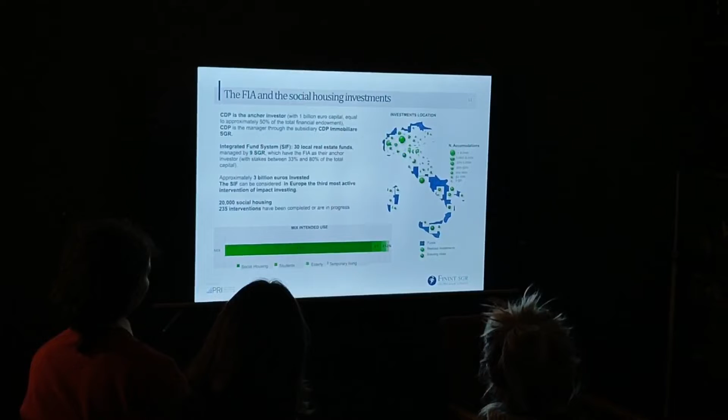So today we have 30 local real estate funds managed by 9 asset manager companies. We invest about 3 billion euros in social housing. For this, the SIF could be considered in Europe the third most active intervention of impact investing.

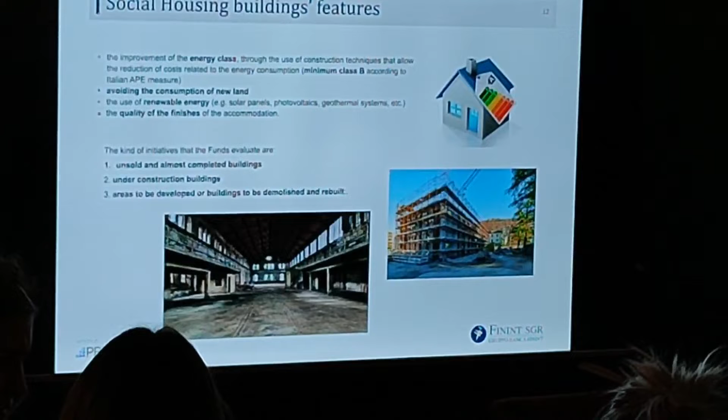We built 235 interventions for a total of 20,000 social housing units. In our social housing building, we pay a lot of attention to energy efficiency in order to reduce the cost of energy consumption, so affordable price and a reduction of energy consumption.

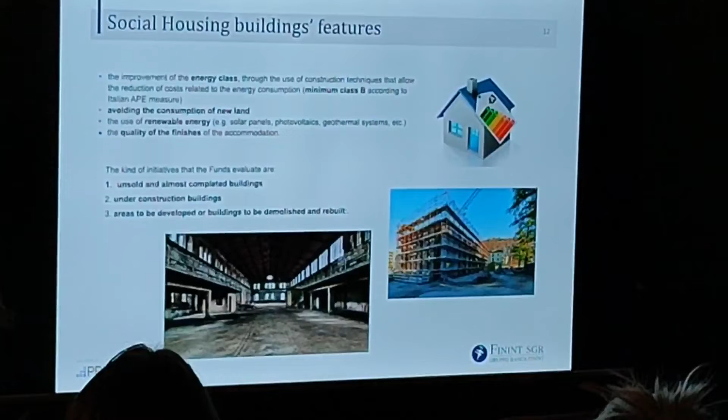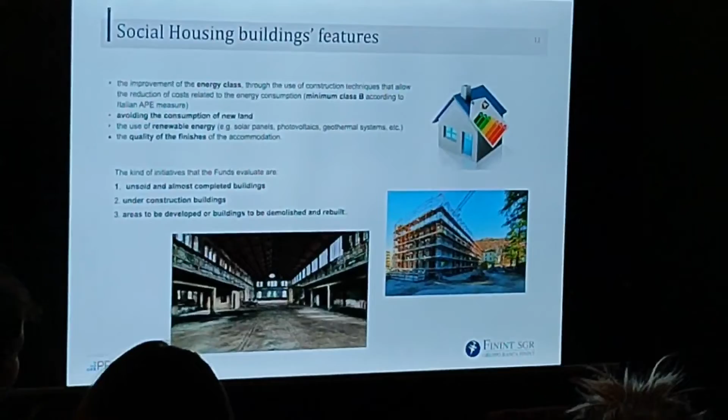We avoid consumption of land, because Italy is an old country, and over the years we have built in almost all the Italian territory. Now our cities are full of disused buildings, so we try to redevelop these buildings, to transform them instead of using new territory.

Then we try to use renewable energy, like solar panels, because in Italy we have an important natural resource, the sun. So we try to use as much as possible solar panels, photovoltaic, geothermal systems, and we pay a lot of attention to the quality of finishes of the accommodation, to give a house of quality to the people.

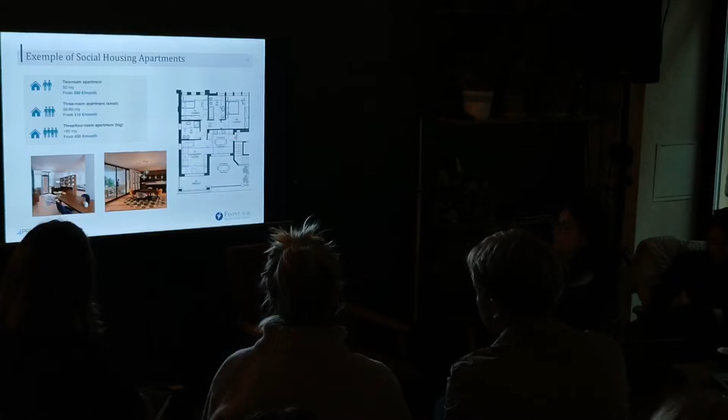In the building, we used to put different types of apartments with different dimensions. We have 2-room apartments that are about 50 square meters, preferred by young people because they are the cheapest, and usually this typology is the most numerous in the building.

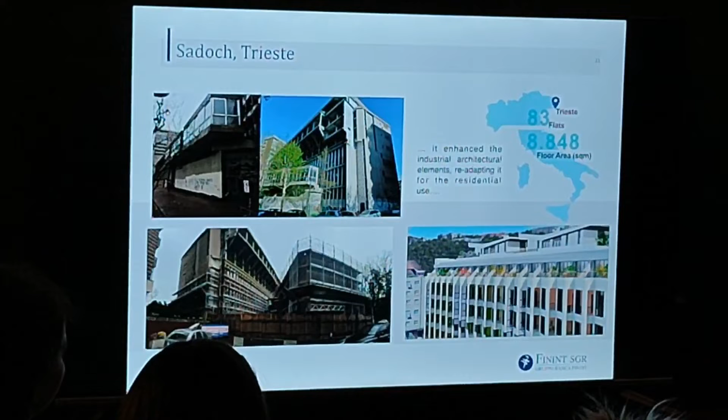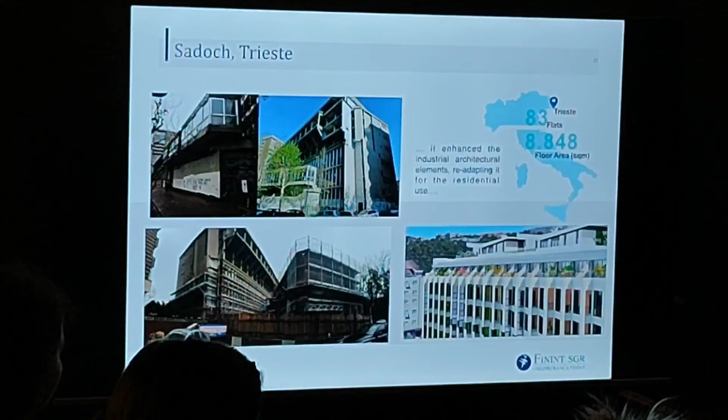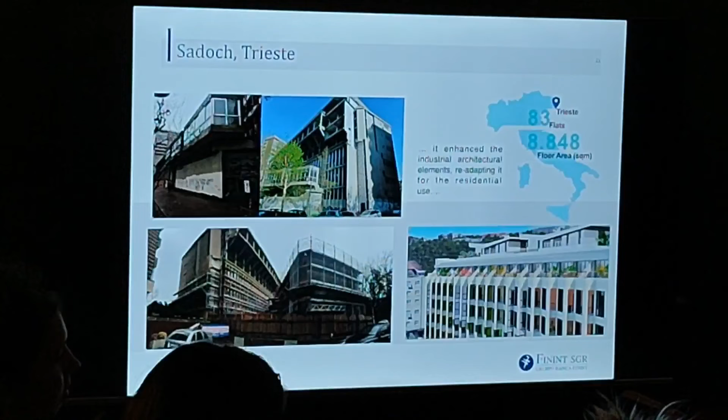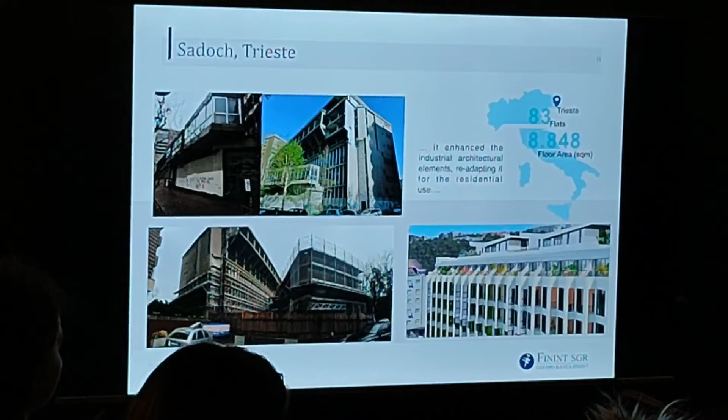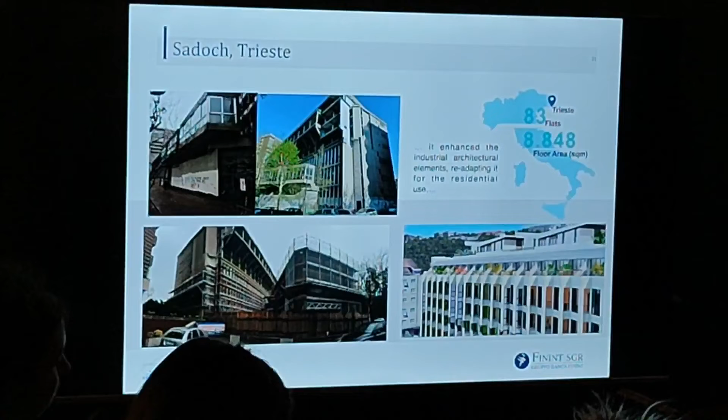In 2016, the fund purchased the building, and after deep remediations, the fund developed 83 flats and 2 big common spaces for sharing activity. The project aimed to respect the history of the building, so we couldn't demolish it, but we had to readapt it for residential use.

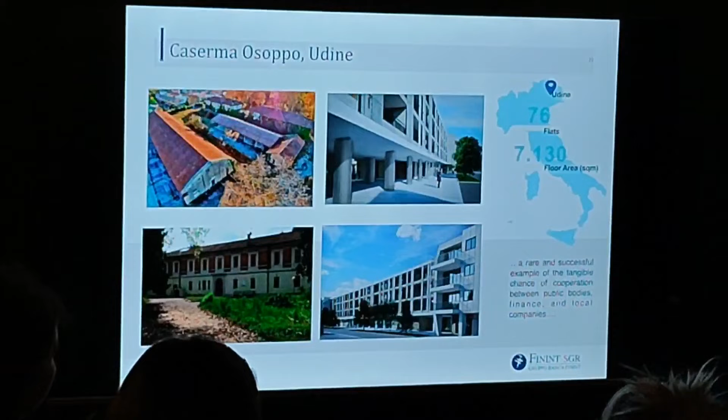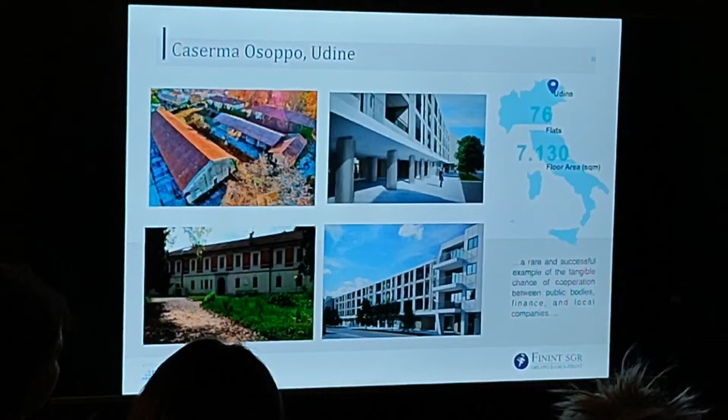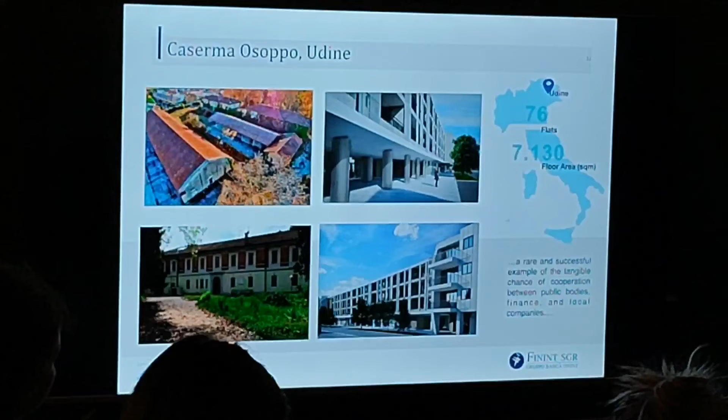Another important project now under construction is the redevelopment of a disused barrack in the center of Udine. The project is called Experimental City and was promoted by the municipality of Udine. The fund will build 76 social houses. This project took part in a call for projects named Bando Periferie, launched by the Italian state, and we achieved public financing.

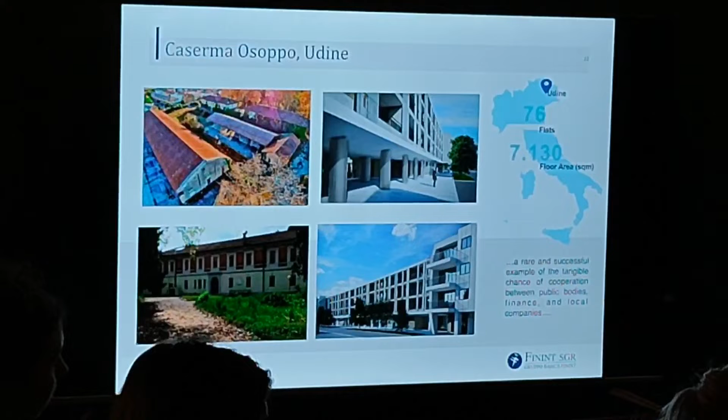It will be a real urban revolution through a deep remediation that will give new life to the district, with new social activities, new residential units, new shops and sport areas.

The other very important fund for us is Fondo Housing Sociale Trentino, which invests always in the north of Italy. We built 500 houses and another 16 are under construction, so we have finished the investment period.

We invested about 113 millions. Here the most important investor is always FIA, with 60% of equity. The second investor is the Provincia Autonoma di Trento, which is also the promoter of the fund, an investor with 20% of the equity, and a contributor with non-repayable grants.

One of the most important projects of this fund is called Ex Marangoni Rovereto, a redevelopment of a disused industrial area in the center of the city. In the area were old buildings belonging to Marangoni Meccanica, an industry that produced machinery for rubber vulcanization. The old building complex was disused in 2007 and the area was abandoned and contaminated.

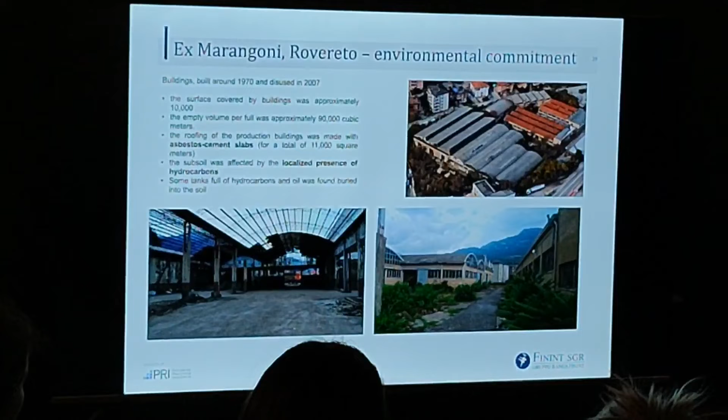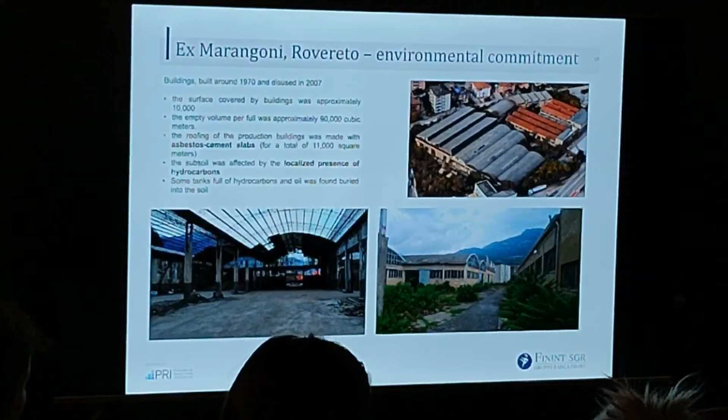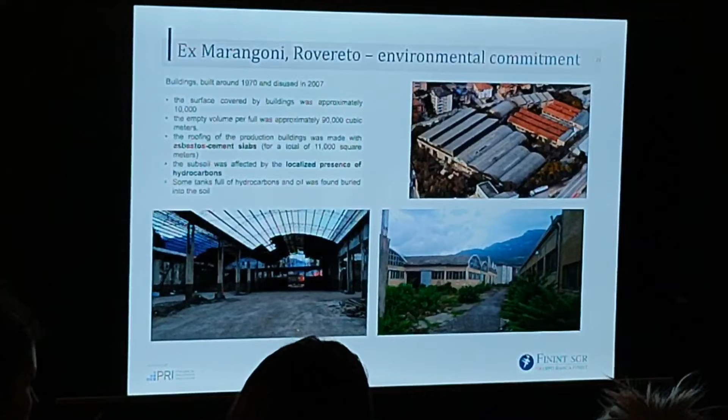The volume of the buildings was approximately 90,000 cubic meters. From an environmental point of view, the roofing of the production buildings was made of asbestos cement slabs, and the subsoil was affected by the presence of hydrocarbons. Furthermore, during the remediation phase, we found buried tanks still full of hydrocarbons and oils, so the remediation phase lasted more than 6 months.

The Ex Marangoni buildings are made of solid X-lam plywood. We started to use wood for construction only in the last few years. Maybe you in Tallinn don't use wood for construction? Okay, I will talk about it.

We started some years ago. This technology involves the complete construction, starting from the ground floor, with the construction on site of the floor.

The advantages of using wood as a construction material are, first of all, the reduction of construction time, since wood is a light material and each element is easily transportable and manageable on site. Wood is renewable and recyclable. It's an excellent thermal insulator and a good acoustic insulator, helping to reduce energy consumption. Wood structures also have excellent resistance to seismic actions.

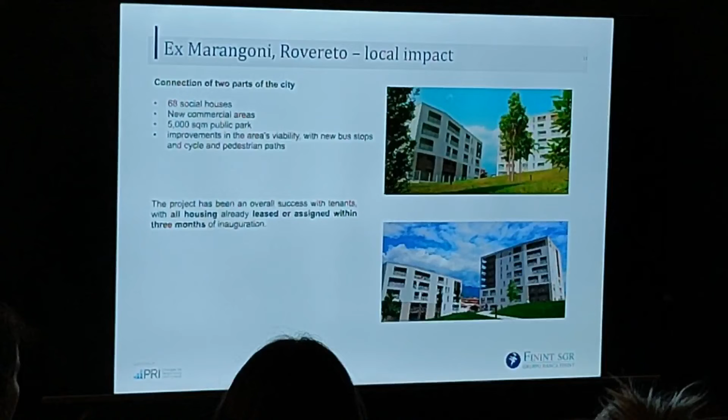So now in this area there are 68 social houses, new commercial areas, and 5,000 square meters of public park. We also improved the area's viability with new bus stops and cycle and walking paths.

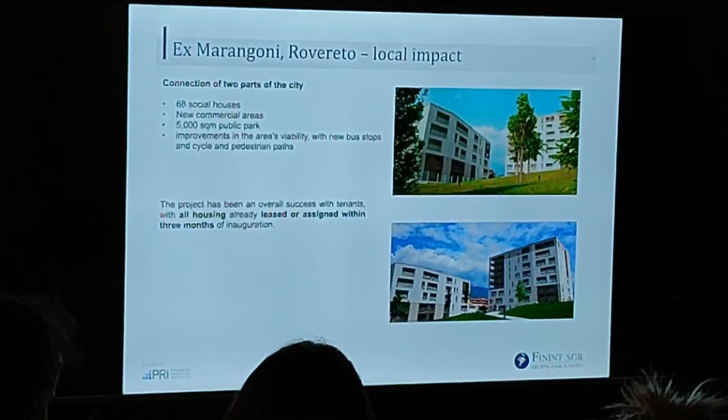In the project there are also some smart solutions. We have environmental smart solutions and social smart solutions. We have a smart irrigation system, urban gardens, bike sharing, and an electric car charging area. We also have social smart solutions such as the book crossing facility and the library of objects, where people can share some objects.

Then we have a smart access system through a digital key managed by a smartphone application that improves the security level of the building, and we have an area dedicated to smart working and free Wi-Fi. There is also a smartphone application to use these smart solutions, and the application also has the task of making communication between tenants easier.

So I don't know if I have more time, or 4 minutes. Okay, very quickly then.

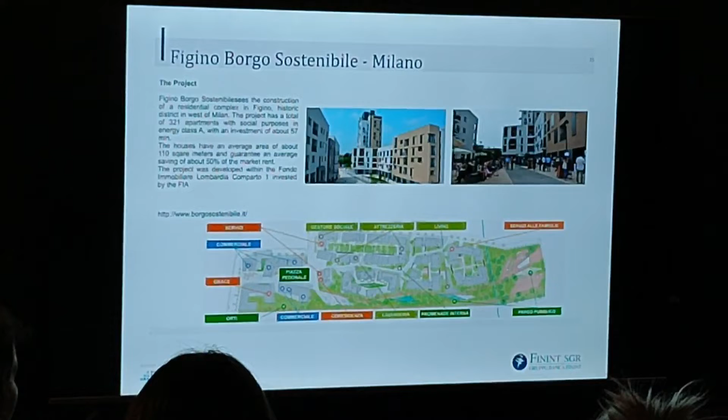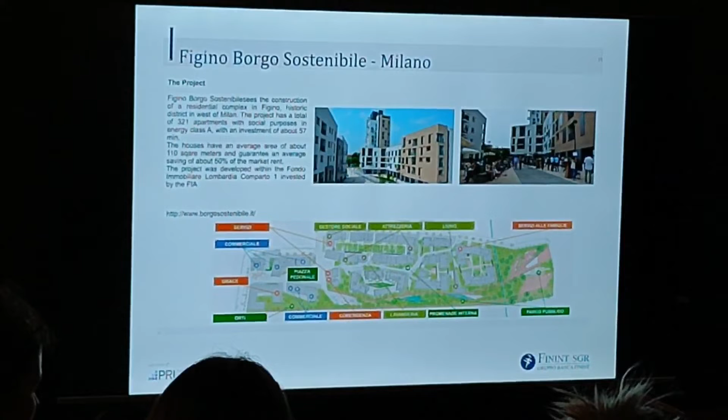Then we have another project, always in Milan. I think this is one of the first projects of social housing in Italy. Borgo Figino is a complex of 321 apartments in energy class A, the highest in Italy, with an investment of about 57 million. The houses have an average area of about 110 square meters. The project was developed with Fondo Immobiliare Lombardia, a fund invested by the FIA, part of the integrated system fund.

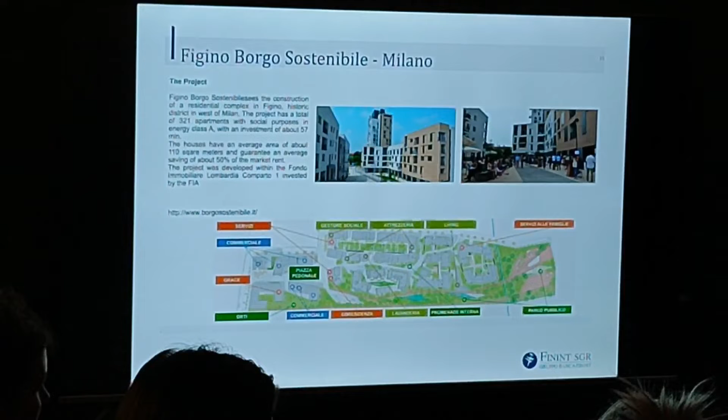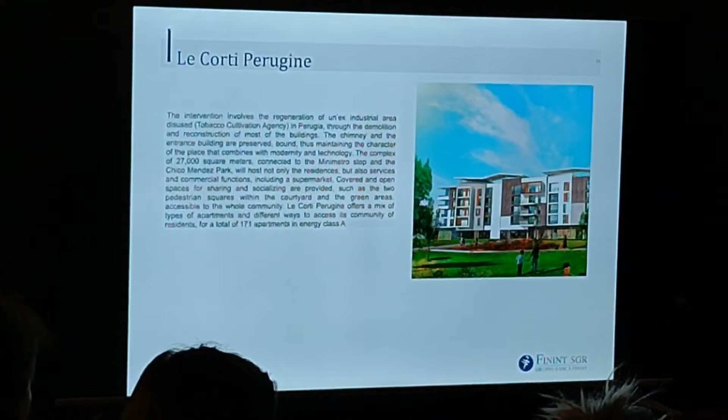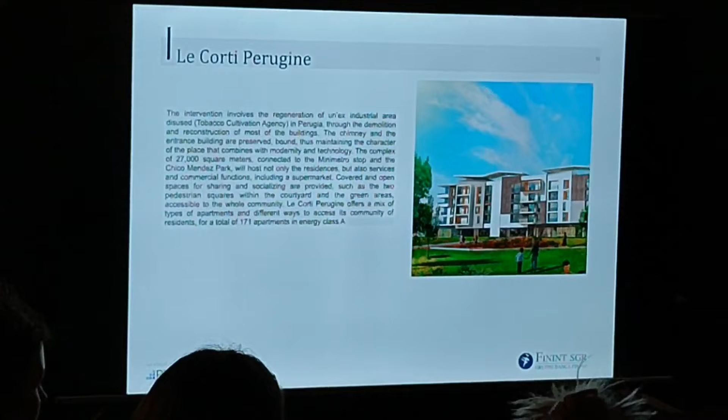The last one is the Corti Perugine. It's a project located in Perugia, in the middle of Italy. It's the regeneration of a disused industrial area, it was a tobacco industry. The complex of 27,000 square meters is located in the center of the city, and now there is a total of 171 flats, always in energy class A.

So now I finish. Thank you. Thank you to you.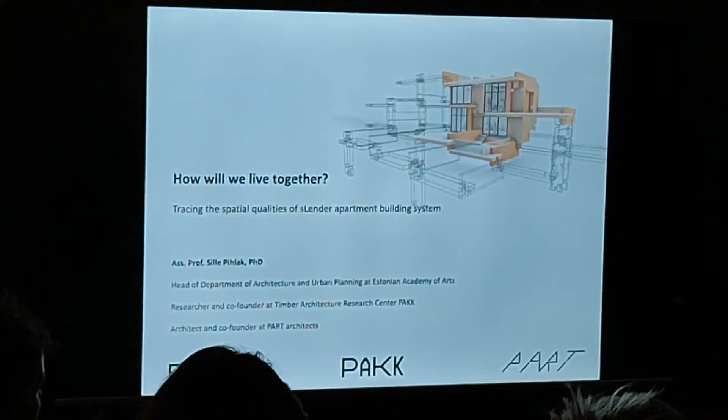Right on time. So... No, this is good. Thank you.

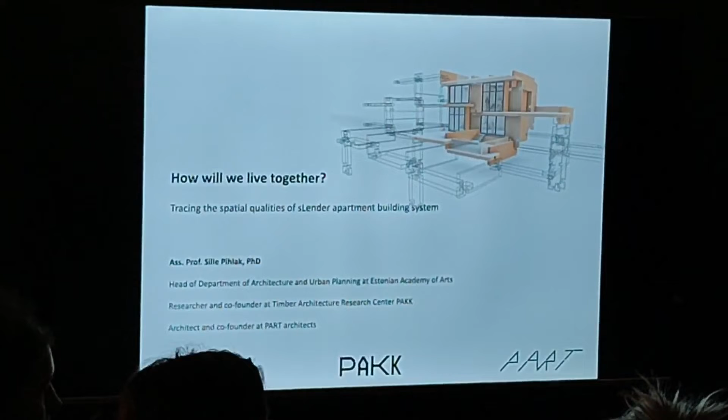So we're going to do a next presentation on top of this one really fast, and then all the questions already raised during this presentation, and during mine, we would do the Q&A in the end. But I think I would be extremely contradicting to your approach, because that is really how to build up a system, and now I'm approaching this as an architect or an artist, trying to find both ends of it, pushing the envelope on both ends, and hopefully by the end of tonight we could synthesize something out of it.

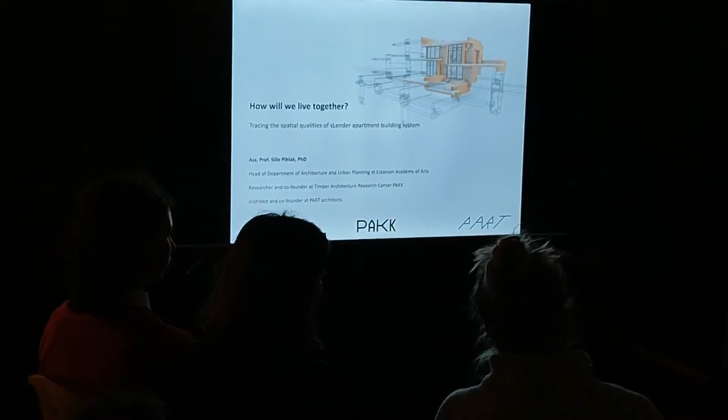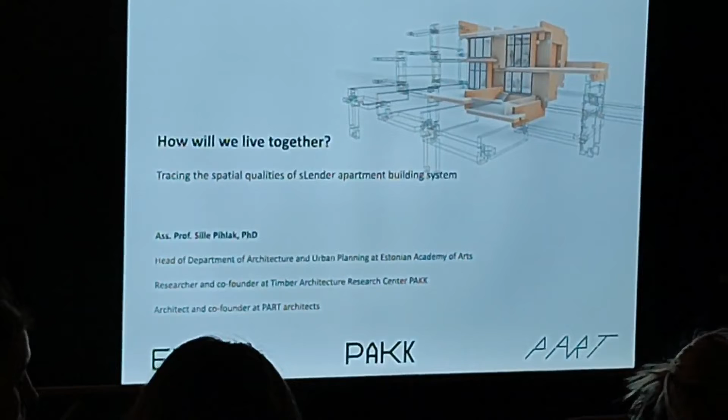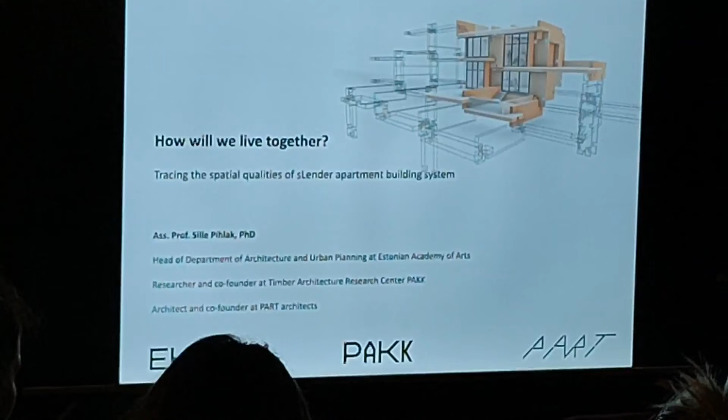But the housing crises are here and need to be encountered. So, first of all, instead of quickly populating livable units, we need to ask how we want to live together. This question is something we have analyzed in our research unit in the architecture department called PAKK, Timber Architecture Research Center. At the same time, my practice in PART is also dealing with that.

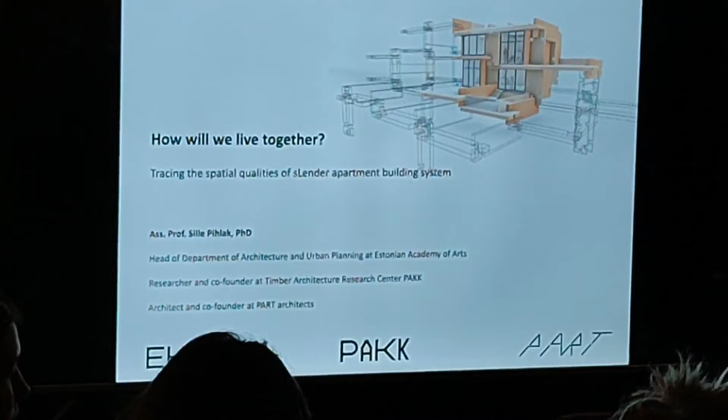So I guess tonight I would like to show you some examples of how we are mapping and tracking the spatial qualities of a slender apartment research project currently ongoing. Why I'm mentioning both ends, as a practicing architect and as a researcher in the office, is to show that this is very much a practice-based research. That's also the method I built my PhD on, the way I analyze the work is through the practice while doing research with it.

I would like to discuss 5 points, 5 points of departure that we have on slender research, first trying to connect it back to the historic context of Tallinn, exploring the methods of designing together, creating design systems and testing them, trying to reach the optimum use of material, meaning a zero waste mentality in construction, and above all, connecting people and the community literally and mentally with the space and through the space.

So the current context, first just to start with, is like why we ask you to be here, because we have quite a fruitful ground to start constructing out of timber, but there are too few good examples of how we do that in urban dense areas. First of all, as mentioned before, the EU statistics also show that we are in the middle of a housing crisis, and the rents are going up slowly but surely, but housing prices, as we love to buy apartments rather than rent them in Estonia, are going up really sharply.

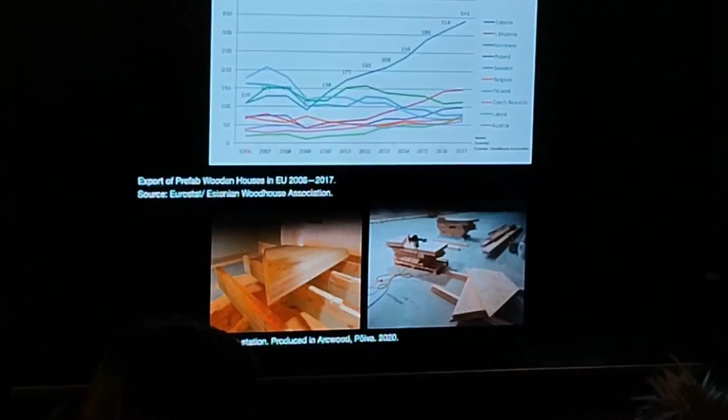The second premise, like the context of Estonia, is the timber prefab industry. We are the biggest exporters in Europe per capita. That doesn't come as a surprise, but I wanted to point it out, especially that we are exporting a lot. But I'm trying to find ways how we could also construct more here.

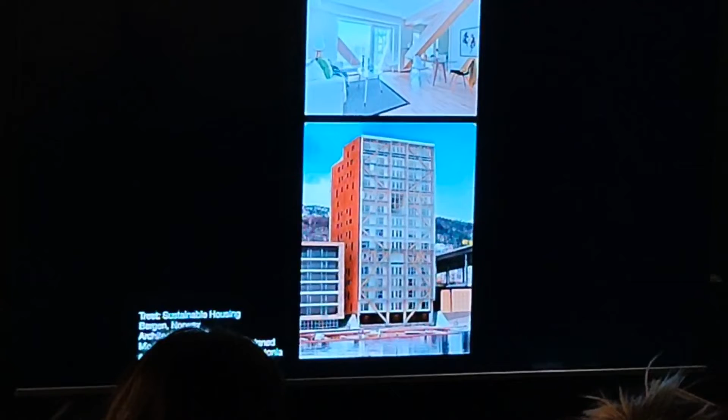Because Estonian timber industry, or more specifically Kodumaja, was connected to the world's tallest at the time Bergen apartment building construction.

And in Estonia, we recently constructed the first CLT apartment building in Põlva. It's sold out for now, but the fact is they needed to have a showcase that we can construct multi-story buildings with CLT in a dense urban area. This is in Põlva, the south of Estonia, but I'm sure there would be better examples coming up in Tallinn as well. One of them may be Slender.

And the third premise is actually questioning how we want to live together. Do we want it to be stacked in a box on top of a box inside of a big box? As you know, we have certain areas in Estonia that could be considered doing that, the Soviet housing blocks. And I think what I want to ask is, like, what if Louis Kahn asked what the brick wants?

I'm asking what the trunk, the timber trunk, wants. Does it really want to be concretized and made a panel again, meaning just translating one material to the other? Or should we find new ways, new forms, new spatial qualities that are actually co-working with the plasticity of the material, timber, and how much differentiation we can create.

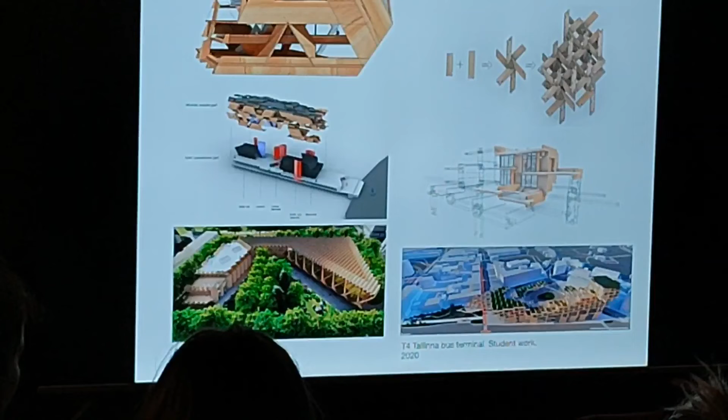Within the housing block, that's why at university we always start in the third year with students creating their own system, like elements or blocks that you can combine. Then next semester we grow into a large scale, 20,000 square meter project with it. These two methods, starting with creating a system and then arriving at livable units, is the duality that we always do.

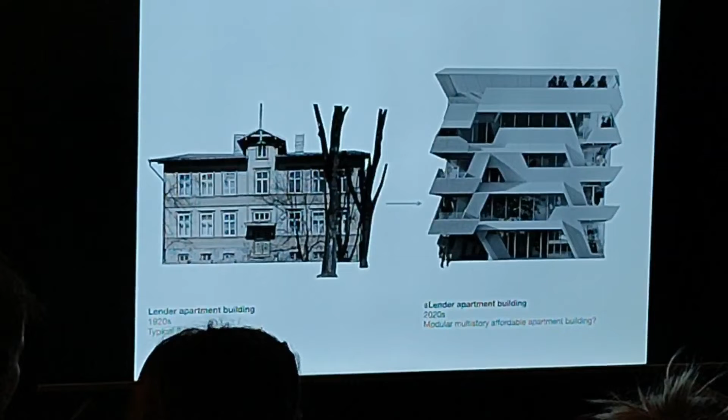So, discussing the local context in this research, I wanted to quickly explain how we arrived at the Slender apartment building name. The research is questioning what has changed in the last century, the last 100 years, where we used to construct Lender apartment buildings a lot, more than 85% in the early 20th century were all timber housing.

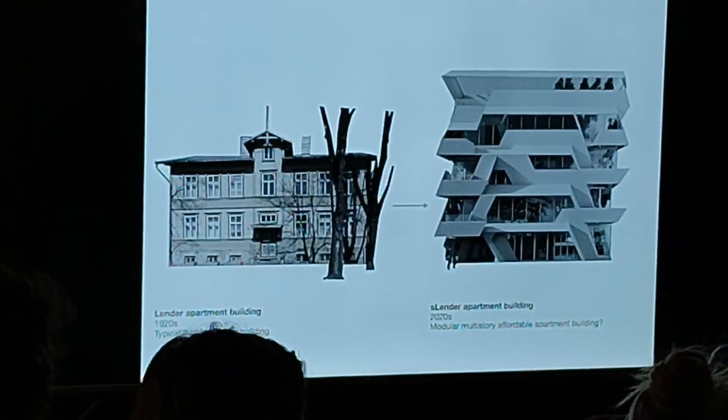And then at Soviet times it was abandoned because you were not allowed to construct out of timber. And now, a century later, we're asking, if there would be a metamorphosis for timber, what and how it should look like.

So Lender was the first Estonian mayor of Tallinn, but he was also an engineer. During his rule, he actually asked for cheap housing to be constructed for the workers who were coming from the countryside to the city center, and it's called the Lender project because during his rule time it was most populated. And as I said before, 85% of all the buildings that were constructed were actually timber buildings.

So we arrived at Slender, meaning that we assembled a dream team last year with technical university researchers and Estonian Academy of Arts researchers, and the aim was to address all the problematics, or the reasons why we don't construct in timber, like the engineering part, how many stories you can actually construct with timber, the fireproofing, the acoustics. If we could conquer all those problems, maybe we can also show with our case study or research project that we can go further. That's why I call it Dream Team, because we really picked somebody from every field.

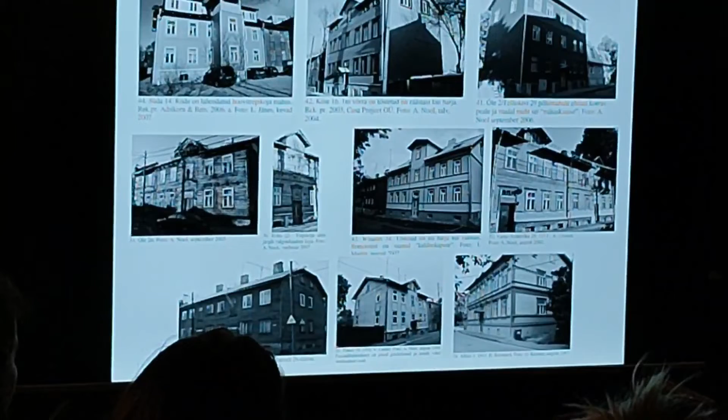These are some of the examples. You might have seen much more of them, but mostly they were 2-story, though there are also 3-story cases, corner scenarios, etc. So all those modifications that happened within the plan make me argue that the Lender buildings were not standardized buildings, as rigorous as, for example, the Soviet building blocks you all know, but much more of a system that was framed by the activities and needs of the owners.

So another thing we're looking at is how can we design together? Who are the partners, and what are the contemporary examples, the contemporary methods that can allow that?

I always like to bring Gaudi into the game, because you might know the Sagrada Familia, where he actually didn't design the form of it, but was form-finding it. Those sandbags that were hung there were actually making the form of the perfect arch, which could then be used in a mirrored condition to create the space, to create the Sagrada Familia.

In the same way, all of us, the users or inhabitants of the building, could be one of those sandbags, and we could adjust the network that is given to be according to our needs and necessities.

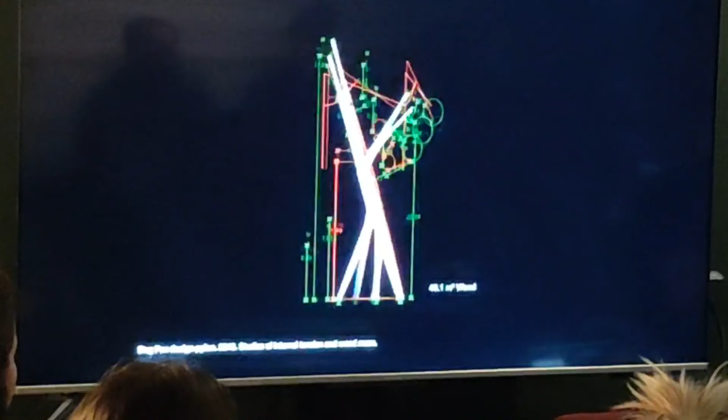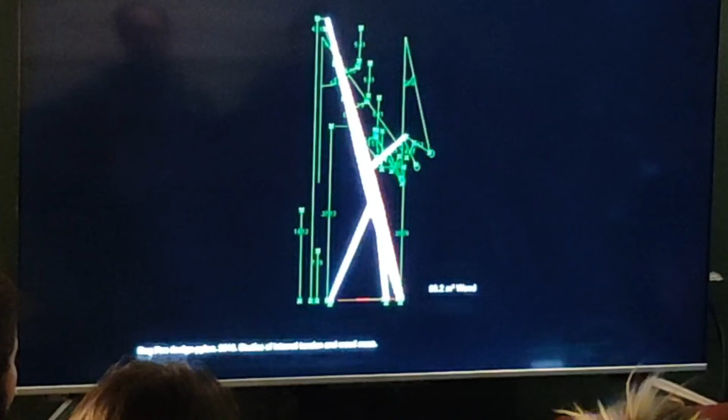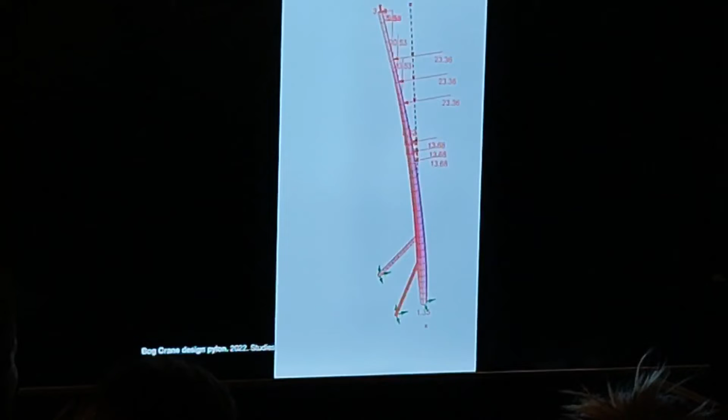In the same way, we look at our pylons, and I tend to bring that as an example, because here you can see how the needs of the structural engineer, the architect, and also the builder are constantly running. So meaning those are not just 6 digits, but much more, a framework of how far it can go so it's still acceptable to an architect or engineer, so that all the forces inside are capable of doing what's needed. We just finished this last week, so it's rather new.

Basically, making those pylon stands, I call them dancing, because it shows how much flexibility it has inside, which is what I hope the social housing to be one day.

So it's not a fixed plan, but in every scenario it's a family of plans, a family of different organizations of what the social housing could be, or what the apartment building could be, and it should never repeat itself. It should react to the condition and the context.

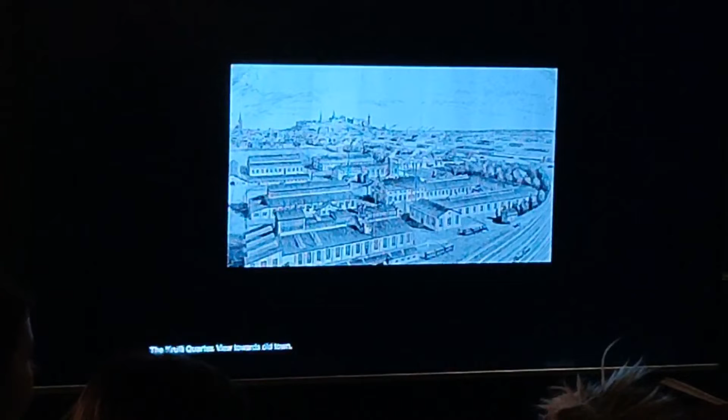In the same way, we looked at students in the Krulli quarter last semester. There were 9 hectares that used to be an old steel factory, and in the back you see the Tallinn Old Town. This street area, facing Volta Street, was asking for 5 apartment buildings, 3-story high, facing the old typical Tallinn buildings constructed from the 1910s to the 20s to the 40s.

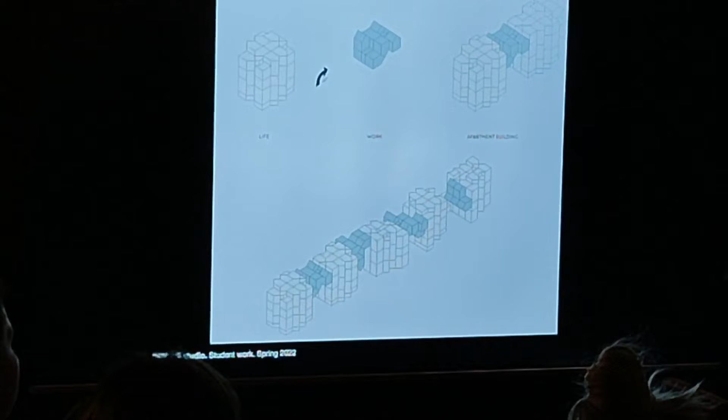We asked the students what things they wanted to combine in this scenario, and they said, okay, we need to put working and living together, but geometry-wise they have to be totally distinguishable. Your working space should not be inside your apartment, but should be squeezed between the buildings.

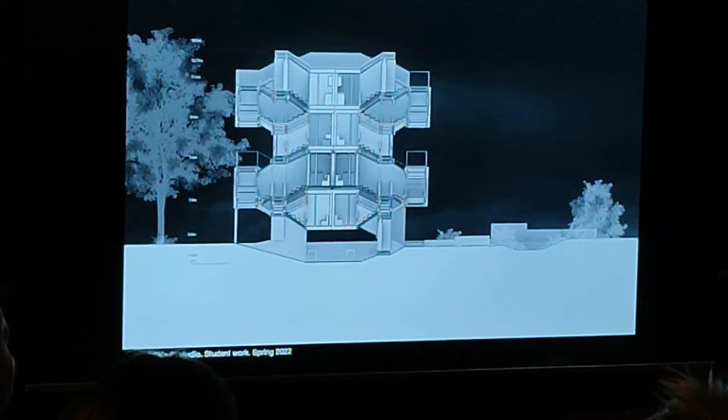So the geometry of space would guide you to understand which space is made for what. Or the question of privacy: how can we walk, how can we pass apartments in a way that you wouldn't look in? This scenario shows an entrance at the bottom, but on top you have your window that no one can ever pass, giving full privacy so you don't share anything.

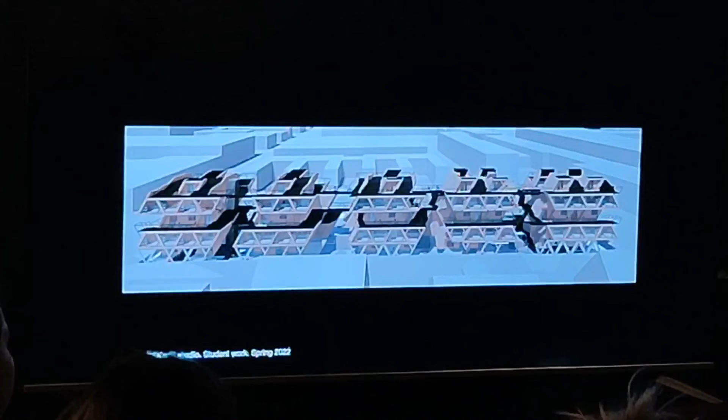Then you would have this row of buildings that share only the outdoor corridors or walkable areas, and these living units are formed as a U shape. Or accessibility—every community decides its own point of departure, but this one, for example, said you need to access every floor with a wheelchair or trolley, and this is something for the community to decide.

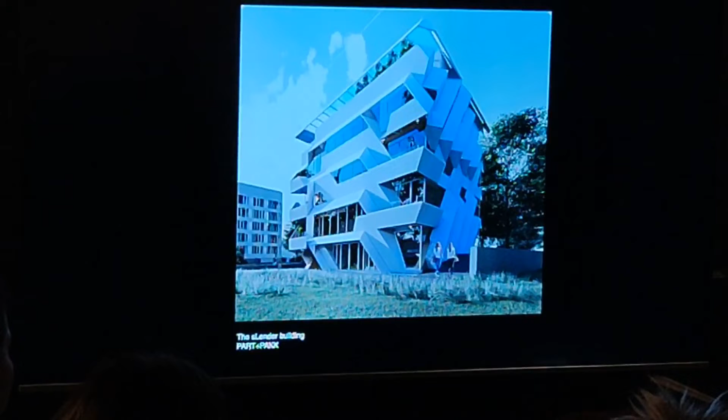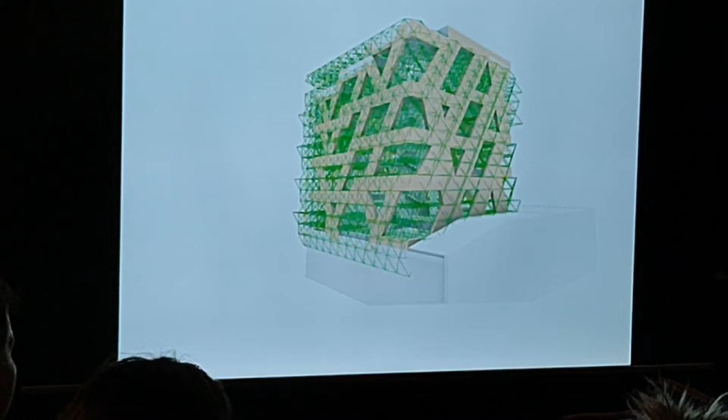For example, this is the slender building we're currently working on. What are the underlying ideas? That's why with students we set up a meta grid, the grid that underlies everything, where we can insert the core. We put slabs that constantly move upwards and helix-wise. We have an outdoor structure also arriving from the grid, and these colors point to possible apartment separations, but they don't have to be like that.

Also the facade that deals with shading allows you to create growing areas in there. So I think the meta grid has become a sort of bounding box, the framework where the actions could be made, instead of the digits.

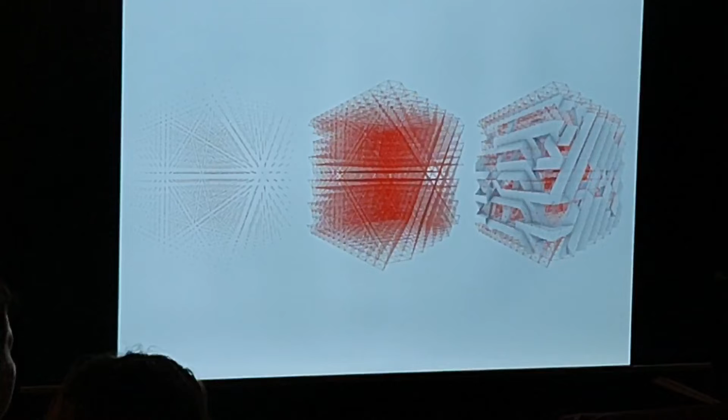So the zero waste mentality is something we've come across in a lot of research. This is one example where the biggest CLT producer in Estonia said that 10% of all material goes to waste, because architects always use big boards where windows and doors are cut off instead of making smaller pieces—like a warehouse situation—and they asked if we could work with it.

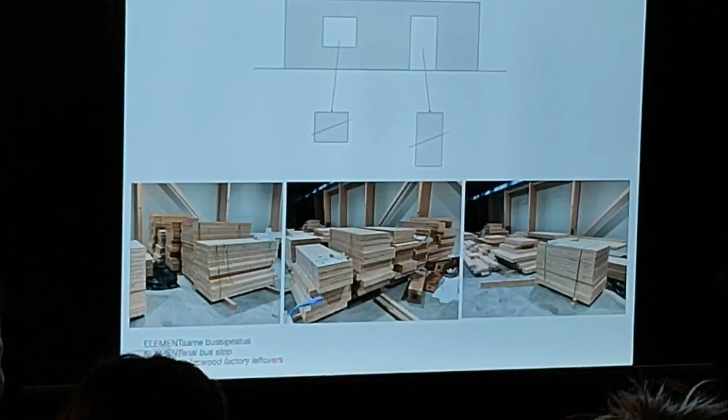This is, for example, a door where we make our own Lego piece out of it, combining it with joinery that has no male or female side, but rather a unique method that could then grow in all directions. That is usually the problem of this system.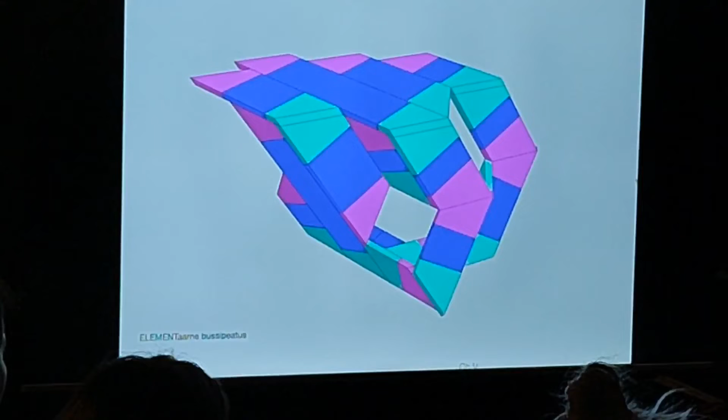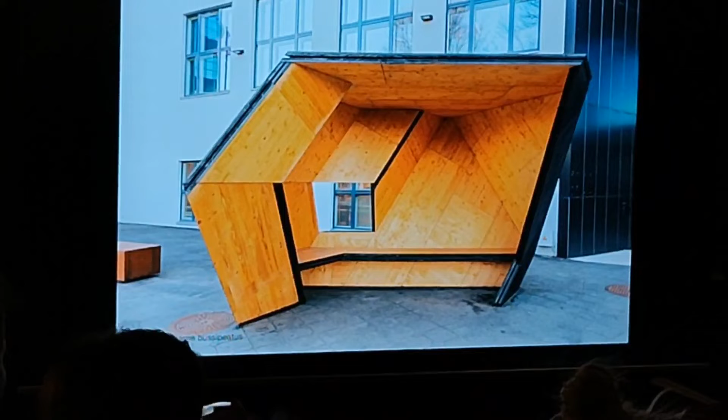So these are, for example, the elements of the bus station we constructed at the end of 2020. This is all made out of industry residues and leftovers—you can really see the doors and windows inside here. And all the stripes show that you can grow the system further, but this system really allowed us to make walls, ceilings, seating areas, window openings, etc.

So I think that's something the grid allows, or creating a system allows—what kind of architectural qualities, programs, and necessities could be taken out of the system itself, and arguing for the spatial qualities.

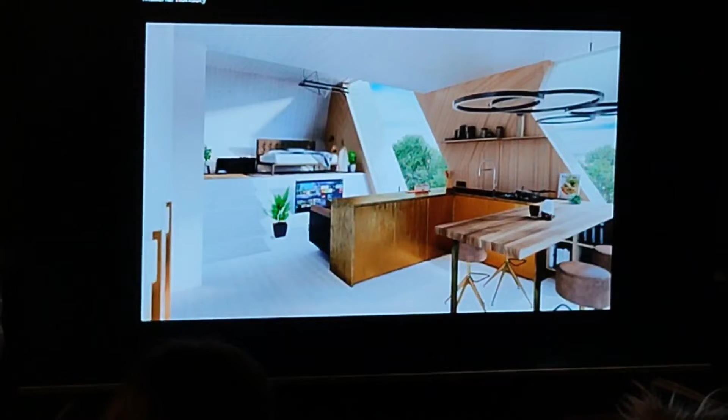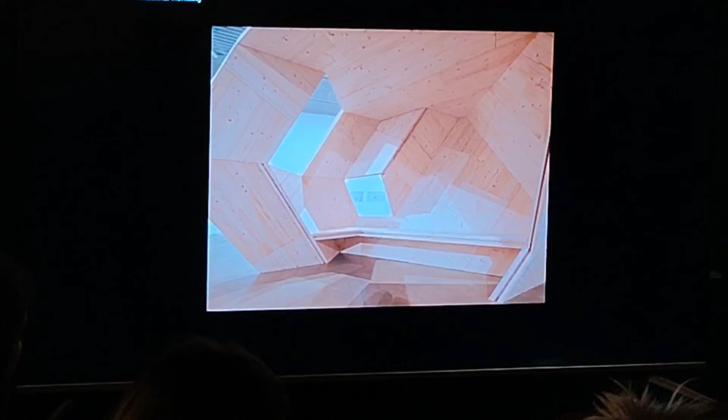There are some points we definitely want to convey with the Slender project. One is material honesty. This is a rendering from the inside of the Slender building, where you can really see the CLT boards that the structure is made out of—meaning, similar to what we saw in the bus station, those qualities, this structural membrane. Because timber could be a facade, an outer facade, right? It could be the interior finish, but it could also be structural.

So instead of having three different ones, as you usually have with a non-material structure, we want to skip the interior finish and say the structural elements of the building could be, or should be, actually visible—so you don't have to put gypsum board on it and hide it away. That's material honesty, and hopefully that would also educate people to understand the space better.

Various room heights—this is maybe more of a real estate developer's argument, you know, that the apartment has a 3.6 ceiling height.

Actually it's 2.6 most of the time, but you would create culminations, a spatial differentiation. So you would understand that the kitchen and the bedroom could have a lower ceiling, but there should be a higher point or gathering, a meeting point, and for example the living room at a height of 3.6.

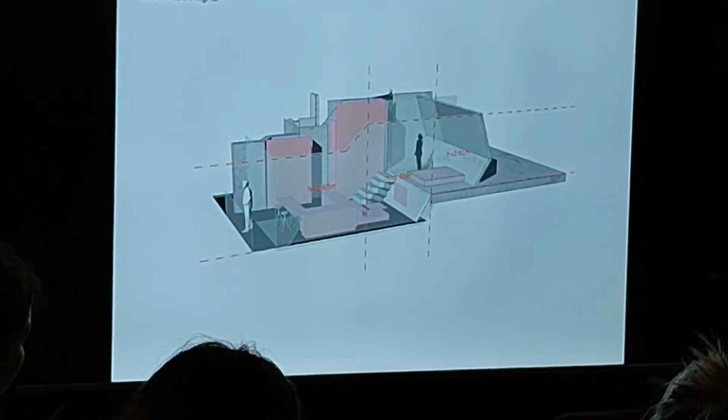This is actually a really small apartment, like a 30 square meter apartment, but it still has those hopefully special qualities. And that's an 8-story study on a slender building where we actually show how the helix system continues to grow as a spiral, and every step is 1 meter further high.

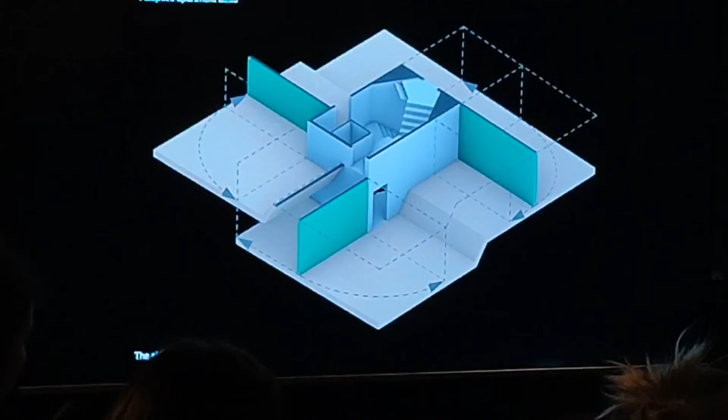So these walls, the green walls here, are actually showing that this could be turned and changed. So something also to work against gentrification. If you have a family where the kids move out, do you need to move out of Kalamaja, or can you actually adapt your living unit and make it still affordable for yourself, continuing to live with your community that you've lived with for so long. So yeah, this is one thing we look at - adaptiveness of apartment sizes.

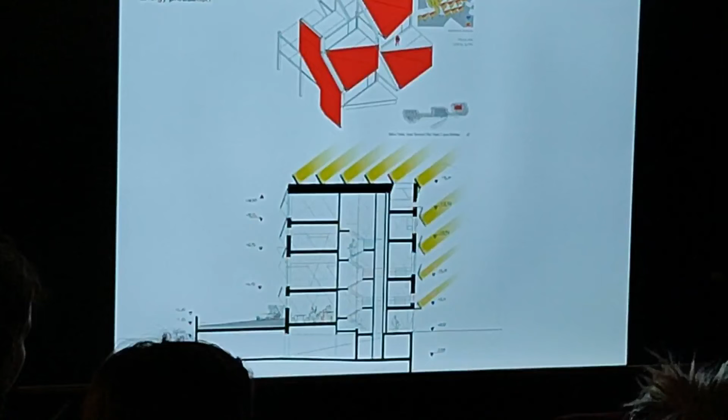The energy production is definitely common ground for everybody. I guess you can't design nowadays if you don't produce energy or don't have energy efficient buildings. So this is something I want to point out, that all those facade lamellas are in a perfect direction towards the south to gather the 43 degrees, to gather all the possible energy.

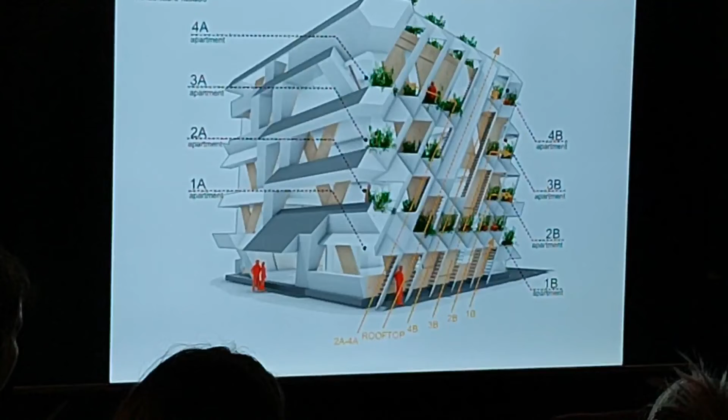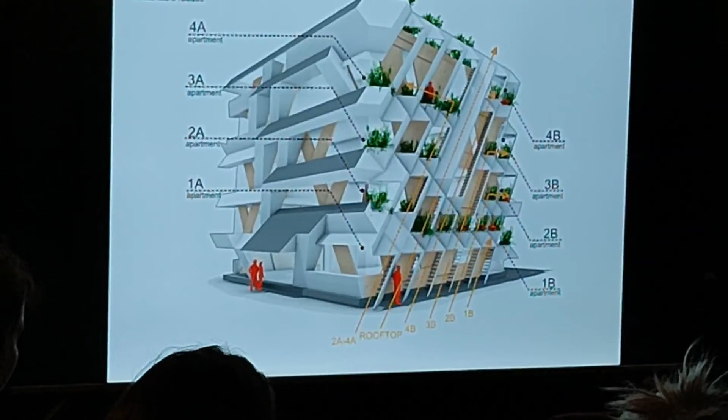And the fifth thing, the facade, is something we are also now tackling in Tallinn Architecture Biennale. So can we use the facade as a new route, a new way to get to the rooftop, an evacuation staircase from apartments, a growing area to have your own crops or whatever you want to grow in there. So basically, can we activate the facade to be much more than an alternative route to your apartment, but also much more than it usually is asked to be.

So we call it a dacha wrap. As we know, the dachas are moving, or they're pushed further and further away. The area around the airport was just recently taken down. There's areas in Maardu, in Jõelähtme. They're all being pushed away.

So we are wondering if we could bring dachas back in vertical order and have all those small qualities, like the harvest pods, the garden gates, the resource collectors, the collective gardens, have all those elements embedded inside the building facade. And we also are raising a question like, can we look at the old Soviet housing blocks with a crate

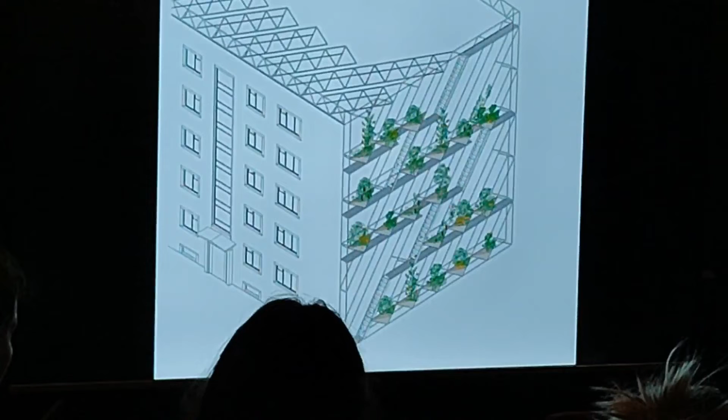Ask them if we could create the firewalls, because there's no windows there, right? If we can make the firewalls sort of like a New York-like escape route, add there the pods where you can grow your crops, your food, and then add the lamellas for safety, but also for the energy production, and also activate the rooftop.

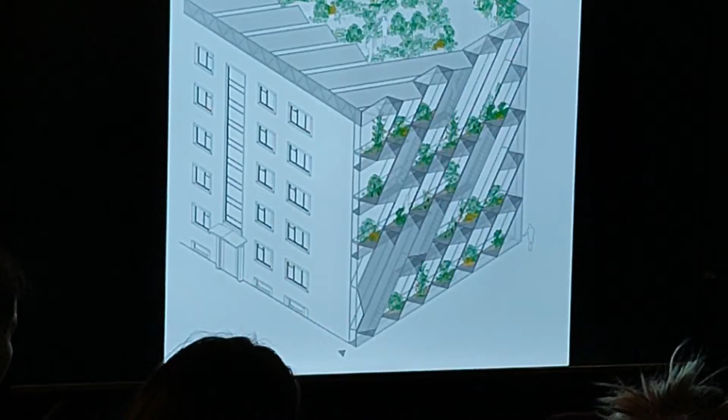So that's a dacha wrap that is currently under construction. I would go after this lecture, go back there and start planting. We have an opening in the Architecture Museum this Wednesday, so you can go and try it out, the ladders and everything inside there as well. So this is a one-to-one mock-up of a dacha wrap facade of a slender building.

But in general, I hope that this slender research is taking us further towards the spaces that we need, the qualities and the questions that are raised, like how we want to live together, and also discussing if there are new functions, new qualities, new ways of thinking, in order to reach the spaces that architecture can actually provide. So I think it's really important to arrive at space before we arrive at standards, and before we start creating new rules or laws for how social housing, affordable housing, everything needs to take place. We need to let the space tell us what it can actually provide.

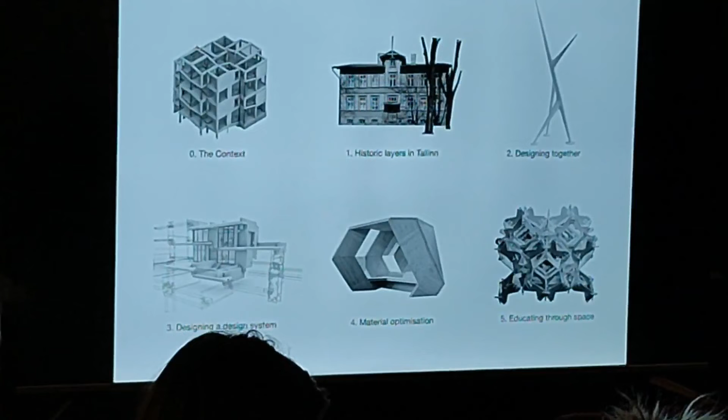So I think these bullet points will hopefully help us go in a direction where affordable housing is there to provide new spatial qualities and also a new understanding of what the communal space could be. Thank you.

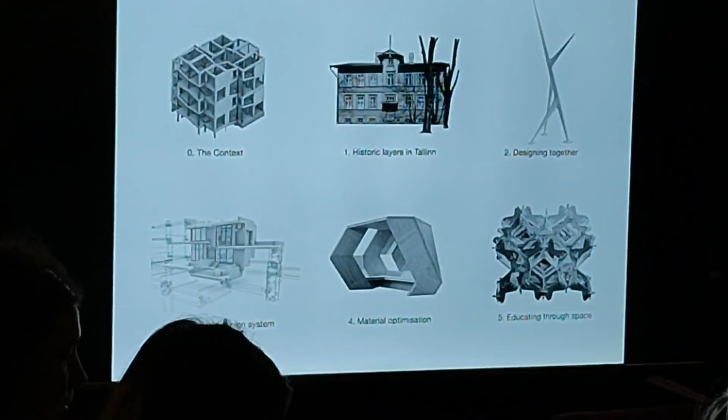First, thank you very much for your presentations. It was really interesting, I'm quite tired following it all. It was sometimes so heavy or so information-packed. But I tried to clear up my mind and start asking interesting questions. But I also hope that all of you will have some questions. I will ask a first few of mine, and then the floor is open.

What I firstly wanted to clarify is what Sille already mentioned a bit - it's not a very spatial question, but about the terms we use. Sarah, you were talking about social housing, but you were more talking about affordable housing, and I think what you mean is actually the same - real estate that people who don't have a big income, who don't own real estate, could afford. So am I right, Sarah? That's actually what you were talking about, real estate with an affordable price. I think it's more or less the same.